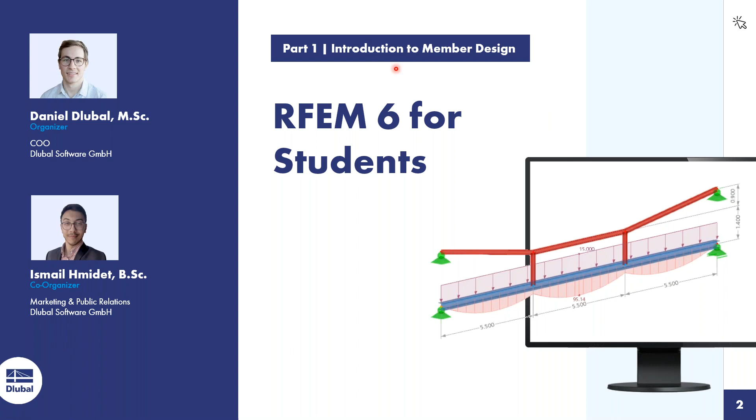So, the first part of this online training series, RFEM 6 for students. Today we have the part on member design. We will give you an introduction to member design and a few words about our platform GoToWebinar. You use, I guess, the web version, so you see it here a little bit like that.

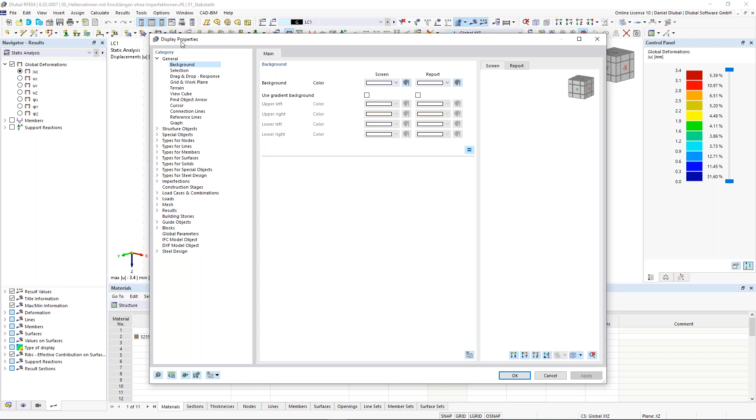Options is quite interesting. I work with a white window, maybe some of you use a black window, no problem. When I go to the display properties, I have the possibility to change the background, load dark background. When I click on that, it changes to dark. So it's up to you. I prefer the white background, so I go back to Options, Display Properties, choose the white background and click OK.

We have today a lot of international students, so it's interesting that we also offer the program in different languages. Let's click here on program options and settings. In the settings tab, you can choose a program language from these. So for the French, Spanish, Italian guys, we have this language. Okay, there are also some other options, but for now it's enough to know that in the menu bar you find all necessary functions and commands.

Then we have the symbol bar. The symbol bar is fast access to the most important symbols you need during modeling, calculation, and load application of your structures. If you want to create a member or lines, just click on that, and then you can create it. I love working with them. It makes the whole process very fast, and also some visibility options and so on.

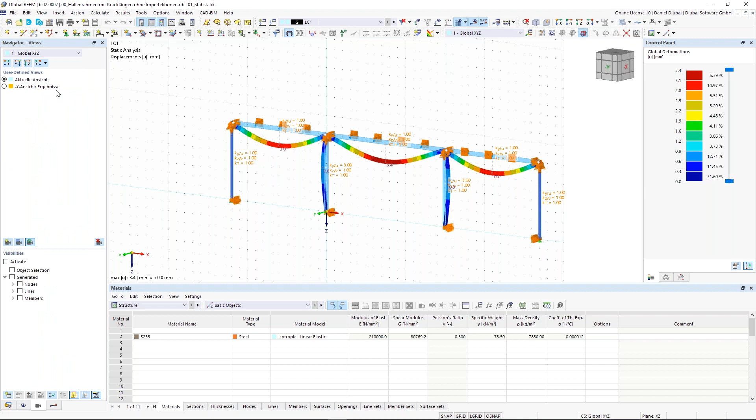Okay, the next navigator is the view navigator. Here I have the possibility to create user-defined views. Currently I see the structure from that view, and when I just want to see the results from the global y-axis or against the y-axis, I can click here and I see it like that. Okay, then I have also the possibility to set up some visibilities. I activate here, for example, members and choose here the member by section. I am interested in the IPE profiles and I see it here like that.

Perfect. So let's jump to the last navigator. This is the result navigator. Here I have the possibility of showing different results. So in this case, the global deformation. When I'm interested in the internal forces, I activate the members, activate the internal forces, for example, normal forces, bending moment, shear forces, and of course also the support reactions. Yeah, so much to that.

Then we have the tables, where you have a whole overview of all objects. You can also create objects in the tables. You can edit them. You can change values. This is a huge advantage because it gives you a very good overview, which is very clearly structured.

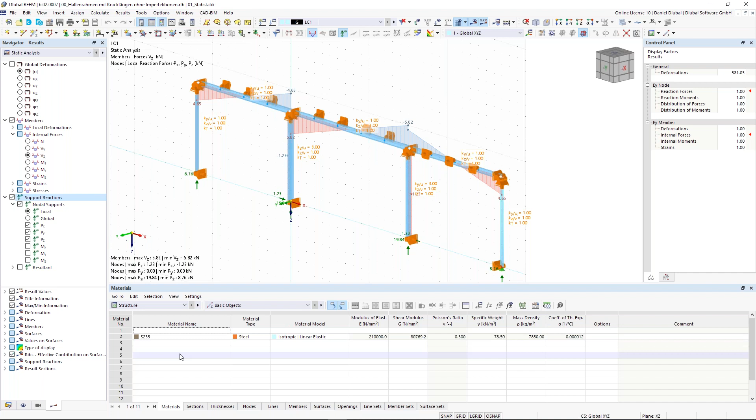I can also jump here to the HEB profile, for example, and adjust it here with another profile. I can enter here a different name and then it will affect all existing members with that. So it's a huge benefit to control it also via the tables, and it will be also very important when we have the interpretation of results.

Okay, now the control of RFEM 6 is quite easy. When you are familiar with other software applications like CAD programs, AutoCAD from Autodesk, then you will get familiar also with RFEM 6. So with the left mouse button, I can select different things. When I go from the left upper corner to the right bottom, then I can select all objects which are included in the selection window.

When I go from the other side, I select all things which are also in this window, but not as wholes. I can select them as whole object. So everything that is touched within this selection window will be selected. Okay, so much to that.

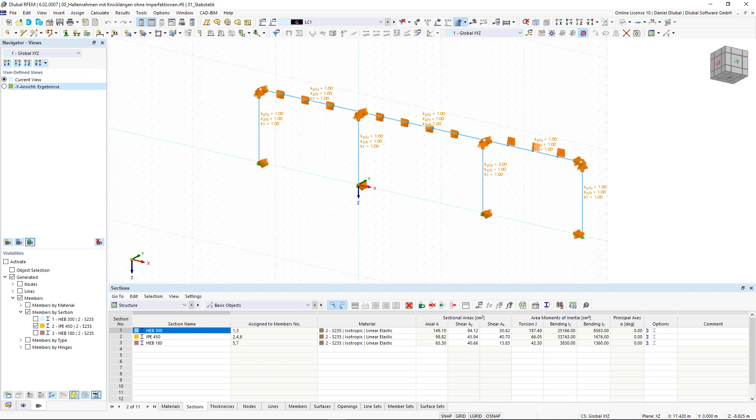Okay, with the mouse wheel, I can zoom in, I can zoom out. And when I want to rotate my working area, just press the Control key on your keyboard, press the mouse wheel, and now you can rotate your working window. Very nice. Okay, you can also use this view cube. It's a new function in RFEM 6, makes it a lot easier to change your views for your structures.

Okay, good. Yeah, this was it regarding the introduction to the user interface of RFEM 6. RFEM 6 as one program is a 3D FEA program for the calculation of members, trusses, but also for surfaces, shells, and also solids. With RFEM 6 as a main program, you can calculate and get the results of internal forces, of stresses, of support reactions, of deformation.

When you want to perform different material-based designs like steel design, timber design, and concrete design, you need the add-ons. The add-ons will be part of our later trainings in 3 or 4 weeks when we jump into the steel design, concrete design, and timber design.

Okay, now let's start with a very simple example. So for those who would like to model with me, now follow my steps. So I create a new model by clicking here in the file and create a new model. And a new window opens, and here I insert the model name, yeah, single span beam. I refer it to a project name. You can leave it here at examples or adjust it to some folders you have created in the past. It's up to you. I will create it here.

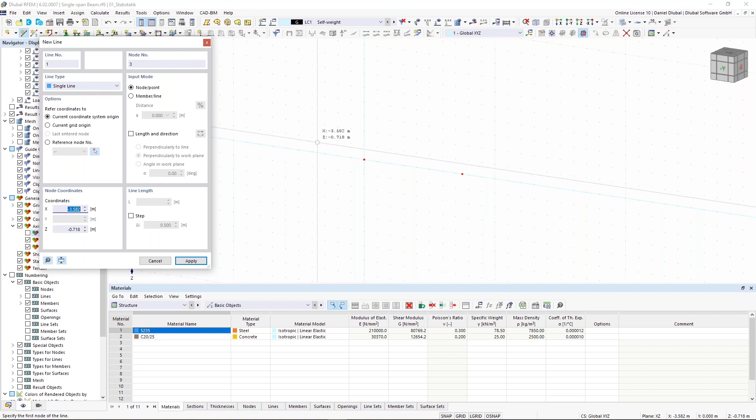So now I see these two nodes, and in order to create the line, I go here to this line, click here on new line, and now I just connect these two nodes with the line. And by double right-clicking or pressing escape, I cancel this function or this command.

Okay, now we have this line, and as I said before, in RFEM we have the philosophy that different objects are linked to other objects. So now double click on this line in order to see what I mean with these linked things: I can assign a member to an existing line. So I activate here this member and a new window appears.

So now in this window, New Member, I can create a new member with a member type and also assign them a section. In the studies, especially in the first semesters, you calculate your structural systems with no stiffness, but in reality you have stiffness. In order to also consider the pseudo stiffness in the first phases of your study, I refer to the member type definable stiffness.

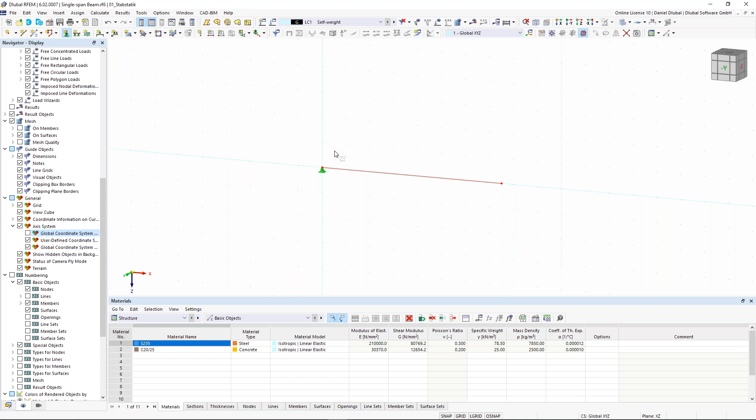So you see here this member. Now we need supports. I go again to the symbol bar, click on assign nodal support, and I choose the hinged support. So I will activate all translational forces. Choose this node, right click in order to close the function, and now I go back again and choose the support with the roller in the X direction in order to release the X forces, and now I have a single beam.

I can show the supports a little bit bigger just by right-clicking on them. I can adjust the size of the graphic, and now I activate load. In RFEM, when you want to create loads, you have to assign them to load cases. And with every new model, one load case, in this case the self-weight, is already created automatically in the background. So I jump to the load case and go to edit active load case.

When I want to recalculate or compare my hand calculations with RFEM, you normally shouldn't consider the self-weight, because it can cause you to not get the same results as your hand calculation. So for this simple example, I deactivate the self-weight and I rename my load case to test load. Oops, sorry, test load. I click on OK.

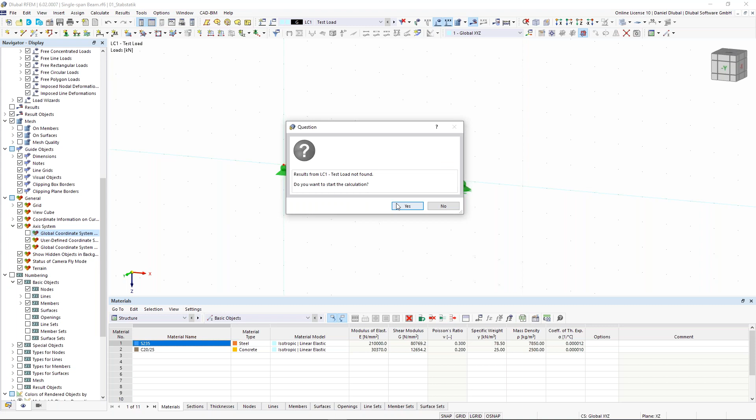So the next thing is calculating the structure. I have two possibilities. I can show the results of this specific load case, or I can calculate everything. In this case, I will show the results of this load case. Then this question arises, and I say yes, because I want to see the results of this load case. In the background, RFEM calculates the results, and then we take a closer look at them.

First we see the deformation, which is a little bit nonsense because we have 99,000 millimeters deformation since we don't have any stiffness. But in this case, only the internal forces are interesting for me. When you have statically determined systems, the stiffness of a structure doesn't influence the internal forces. Only with statically indeterminate systems does it have an impact.

So I go to Members, here in the Results Navigator, and activate the shear force. I see the shear forces in kilonewtons, and then the bending moment My, 18 kilonewton meters.

Interesting. Now I activate the support reactions. I see the support reactions, also pretty interesting. Now you can make a kind of plausibility check, comparing the support reactions with the shear forces, for example, and yeah, they are the same.

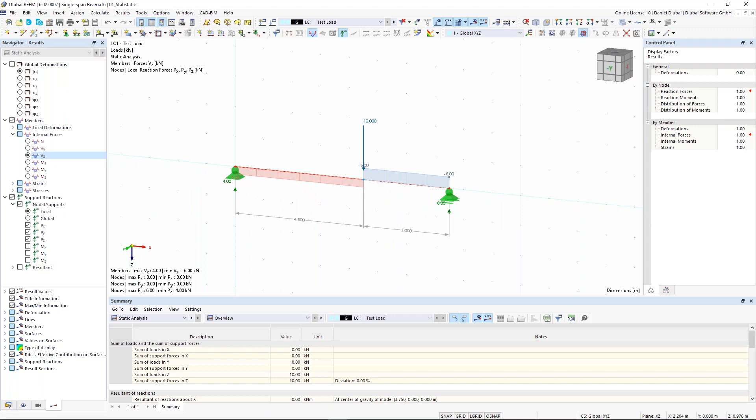On top of that, I would like to show you one more thing. When you want to measure things, you can give them dimensions. So here in the symbol bar, I click on linear dimension. I click on these nodes and say, okay, the XZ plane, and I can put the dimensions depending on my nodes here, for example. It helps to make it easier for you.

One thing more, at each member I can also show the tensile direction. So I go to the display navigator, activate the tree structure of the members, and in this case I can show you the bottom fiber. This is the correct word, not tensile direction, but member bottom fiber. You see this dotted line, and it shows you in which direction the tension would go for the bending moment, for example. Also the member orientation and the member axis, but more on that later.

Okay, now this was it, this was the first example, and I have also a question prepared for you. Let's do this. It's a multiple choice question, so more than one answer can be correct.

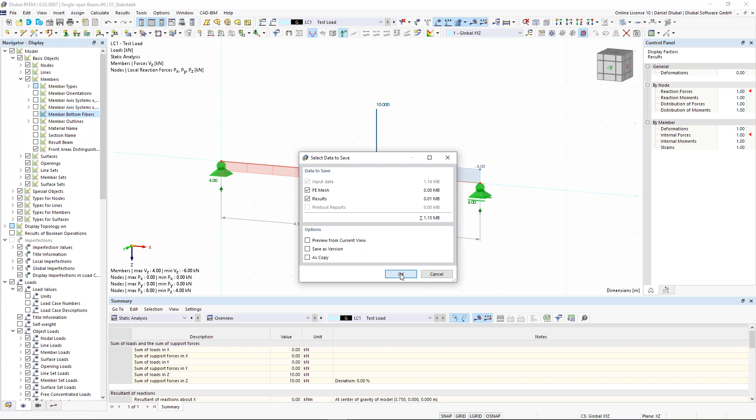I have a two-field beam, so I will save this here. I go to File and say, okay, save as new. So I will create now a new file or new model: two-span beam. I click on Speichern, which is the German word for save.

And I delete everything. Just select everything and then press the delete button on your keyboard. And now I will create two members. So now we have another philosophy for the two-span beam. I click here on the symbol bar, new member, and now I create a new cross section, a real cross section.

So I go to the Section tab, and as you see from the last project, RFEM remembers the last sections you were using for your projects. In this case, I will create a new cross section, so I click on this button to create a new cross section.

And I open here the cross section library, and I am looking for a standardized profile. So in this case, an HEB profile. I scroll a little bit down and then I will find here this HEB profile. I refer to the Euro norm, so more to the Eurocode. And here I find HEB 300. This is absolutely fine for me.

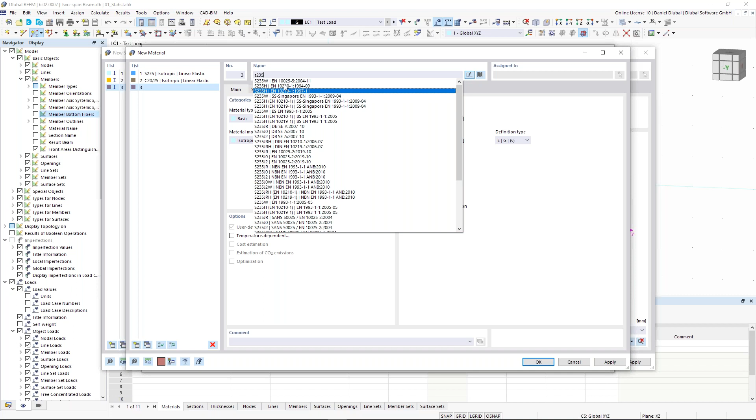So I can enter here S235, and now I can choose here the one I would like to have. But I don't do it because I have it already here in this case, so I cancel it. I just need here this one. Okay, I click on OK.

And now you see here for my member start, I have here this HEB profile and this material. I click on OK.

And now I create a beam with a length of 5 meters. So just go here to this grid point, 5 meters, and again 5 meters. So the total length is 10 meters, but in the middle I have here this node.

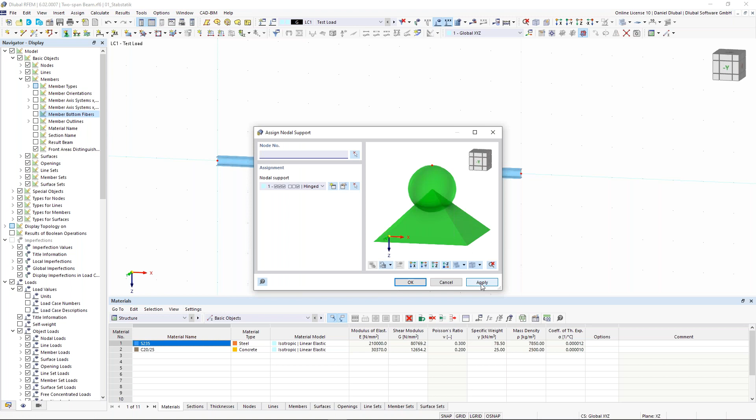The next thing is that I want to have here support directions. So I activate here this nodal support again. And now a very interesting function in RFEM is that we have here also this apply button. I show you how it helps you define or assign different objects easier for your structure. So for the first node, I would like to use here this hinged support. I choose here this hinged support for this node, click on OK. And now I don't click on OK, but I click on apply. And this node will be created automatically.

And the next thing is that I change here the nodal support, choose here roller in the X direction, and select both nodes with a selection window. Click on OK again. And now I click again on apply. And now you see, okay, how easy you can do this with this dialog. I click on OK. And now you see here the structure. Perfect.

So what's next? The next thing is that we consider now different load cases. Because when I refer to my PowerPoint, I will show you my PowerPoint. We have here this two-span beam, and information about the profile and so on, and also here 3 different load cases. And I would like to combine them in order to determine, first of all, the results like support forces, internal forces, and so on, but also the governing load combination, or the leading load combination that causes the largest internal forces, because we will have here also 2 additional load cases like the imposed loads, at first for the left side of the beam and then the right side of the beam.

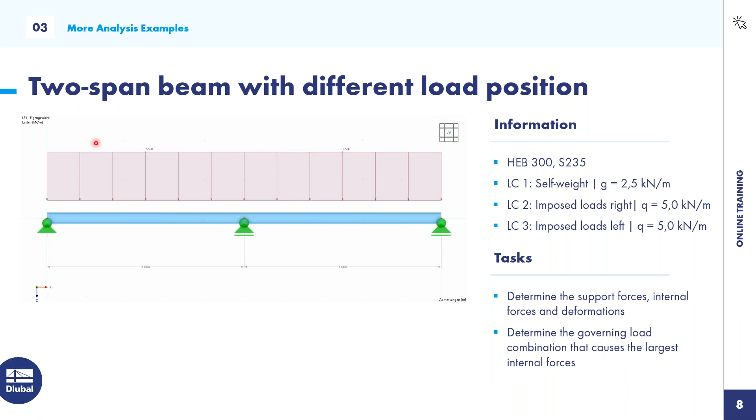Okay, let's go back to RFEM 6. Let's do this. I go here to the data navigator because you can also access the load combinations or the load cases from the data navigator. Just click here on load with the right click, load cases and combinations. It will open here this new window. And now this is also pretty nice.

I would like to combine different load cases to load combinations. And therefore I can refer to some standards. I refer to the standard of our Eurocode because I'm from Germany, this is familiar for me. You can also refer to other standards. We offer a lot of other standards, like the American standards, Canadian standards, and so on, and also the classical European standards.

Okay, and now I will also activate the combination wizard, because this is a kind of tool which helps me create these combinations of load cases automatically, and I don't have to do it manually. This is a huge advantage. So I go here to load cases. I rename here this load case with self-weight.

I activate the self-weight here, and I create 2 new load cases. The new load case is imposed load left, and I choose the correct action category, in this case imposed loads category A, according to my European standard. Now I copy the load case and call it right, because with that load case I apply the loads on the right field of this member.

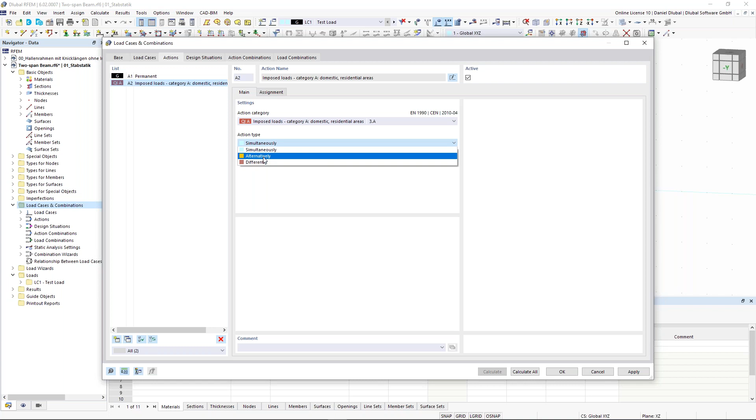Different action types: alternatively, differently, and simultaneously. When I choose simultaneously, this means that both load cases can be combined with each other. Alternatively would be they would exclude each other. So simultaneously would mean that load case 2 can be combined with load case 3. Alternatively, load case 2 with load case 3 can't be combined.

Okay, so let's go to the design situations. According to the Eurocode, the European standards, we have different design situation types. The serviceability state isn't interesting for me, so I choose them and delete them. Just the ultimate limit state - I go here through the information, and here you see short information about the combination rules, so the permanent factors, partial factors, and also here some coefficient combination, the partial factors.

Yeah, so it's interesting how the program combines the factors for the load cases. Now you can see here the action combination. Let's jump to the load combination, and let's pick this one. So here you can see the partial factors, that is 1.35 times load case 1, plus the other partial factors, partial factor 1.5 times load case 2, and so on.

And now here you see also these leading load cases or leading action categories. It's pretty interesting just to know how the program considers these different load combinations. Load combination is nothing else than a combination of different load cases under the consideration of these partial factors and combination factors. Okay, I click on OK.

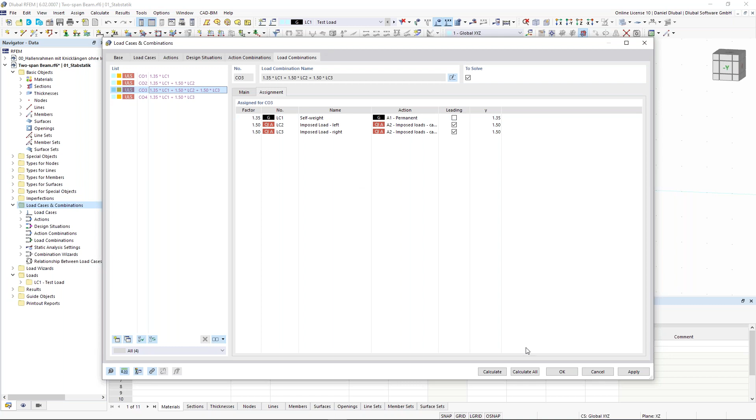Now let's apply the loads to the load cases, and this is the pretty nice thing. I go here to the load case self-weight, and go here to the new member load. What is now really cool is that I can stay here in this dialog, in this window, and can apply and assign all loads to my structure, and change the load cases in this dialog. This is a huge advantage, and I like this very much.

So I click here on load case 1, self-weight. The load magnitude is in this case 2.5 kilonewton per meter. Now I select the members, draw a selection window because I want to select all members. I click on OK, and now apply and next.

And now this is a perfect thing: I can change the load case, change here the load magnitude to 5, and assign it to the other member, but stay in the same dialog. This is pretty nice, makes a lot of fun for me. I click on OK, say again apply and next, and do the same thing for the right load magnitude. So for the right load and field, click here the right field, click on OK, and then in this case it is enough when I click on OK.

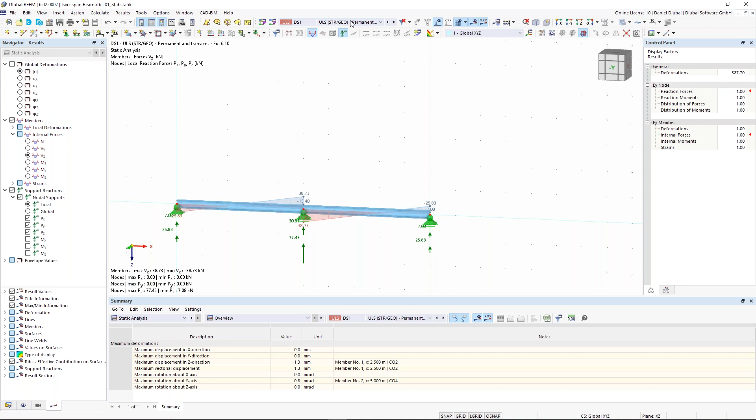Okay, now let's do a kind of verification or validation interpretation. So first of all, I always check my results in the self-weight load case because this is clear. I go here and check the results. So first of all, the global deformation. I see the global deformation here. When I want to see it with some colors, no problem.

Go here to the chapter of area members, and with diagram, and here deformation, section colored. So this is a deformation, sorry. So the area deformation, members, and section colored would look like that. You can see here on the right side a kind of control panel where you can see these colors.

Okay, the next thing is the verification of the vertical or the support forces, and I see here as sum, the sum of loads in the Z direction is 36 kilonewton, and the same sum here in support forces, so there is no deviation, and this is good for me.

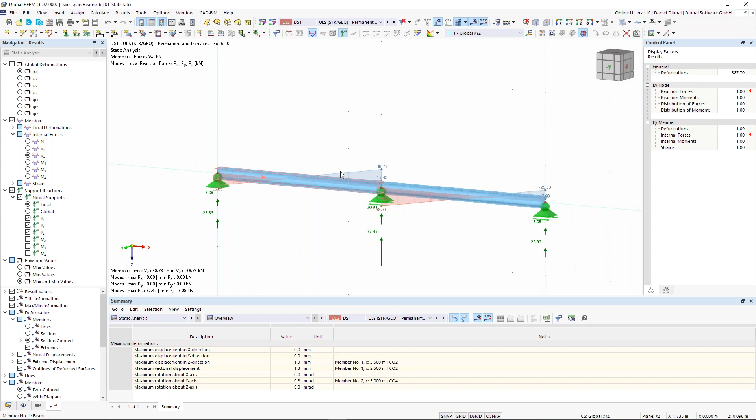Okay, the next thing is, let's go to the design situation. And as I said before, I want to see envelope values. So let's go to the members, and now you see here different kinds of distribution values of the shear forces and also the bending moment. And I can say, okay, please show me the maximum values. So in this case, the maximum field moment.

And when I take a look at the minimum values, I see it here. So the minimum is here, minus 37. So the support bending moment. Okay, this is the summary, and now it becomes interesting because I want to see the results by member.

So I go here to the table, static analysis, results by member, and I go here to the internal forces, and now I want to take a deeper look at the maximum field moment and the maximum support moment. So the most minimum and the most maximum value. And here I go to the extremes area, and here I see these two results.

So I see here the maximum value of the bending moment My, and now I see also the corresponding loading, and this is in this case load combination 2, and for the minimum value it's load combination 3.

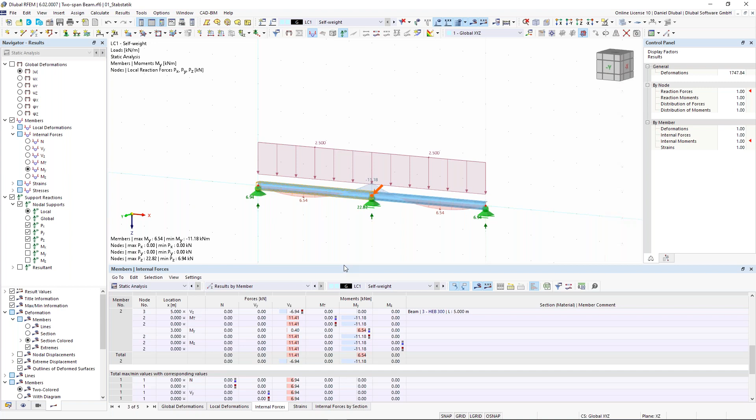So one thing more, I go through the self-weight. Now you don't have to do this with me, just pay attention because this will help you when you are working with RFEM 6 and during your studies. So when you work with table books where you can just put in your dimensions, then you get some results for the maximum bending moment or shear forces and so on.

It's important to know that these kinds of table books don't consider the shear stiffness, and RFEM considers the shear stiffness. What is the shear stiffness? Taking into account shear stiffness leads to an increase in deformation due to shear forces. In order to deactivate it, you have to go to the cross-section and then you can deactivate it.

So remember here the support bending moment of minus 11.18 kilonewton meter. I go here to the sections, in this case HEB, double click on that. And now you can see here deactivate shear stiffness. And the influence of the shear is dependent on the cross-section areas AY and AZ. When I deactivate, they have no value, and the shear stiffness isn't taken into account.

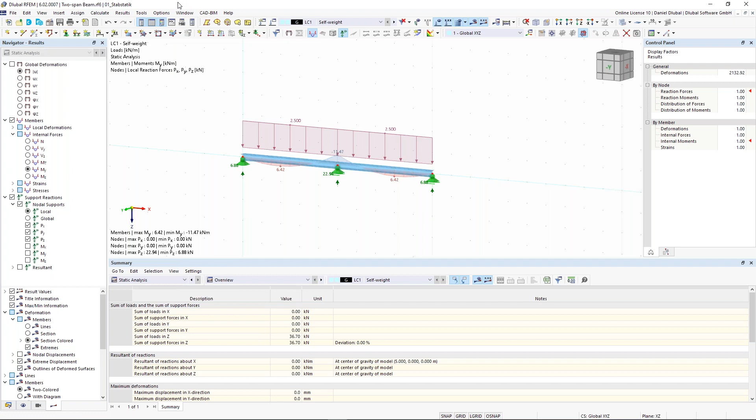So if you want to take a closer look at the standards we support, go to your project or your model and just right-click Base Data, or also here in the symbol bar you find this option. Click here, and as Ismail mentioned, we support different standards. Just go here to the add-ons. You can activate, for example for the steel design, different standards. So I click here on OK, and then you see that we support different standards, and also the different national annexes. Okay.

So let's continue. Now I will do an example by myself, so I will make it a little bit faster. So just watch and learn. Oh no, sorry, I don't want to delete everything. Now I want to add hinges. This is one-time statically indeterminate, so I want to add a hinge here in order to make it statically determinate. So how to do that?

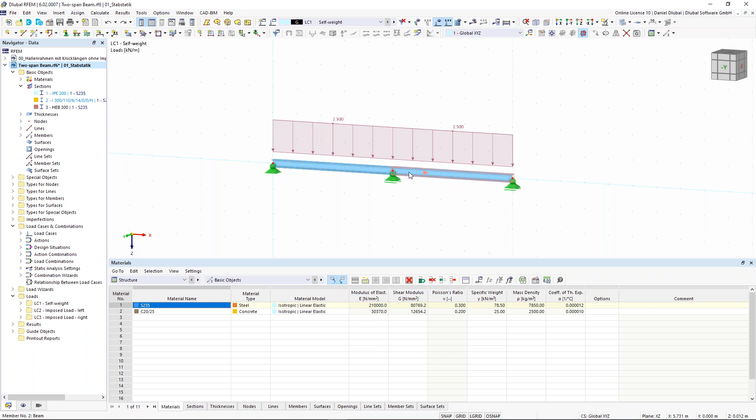I click here on this member. Then for better visibility, I change the visibility mode to wireframe mode. Then I right-click on members and divide the member by distance. And now I would like to divide this member at a percentage of 17%.

Why 17%? In my German student book, Schneider Bautabellen, there is a hint that in order to make the support bending moment and the field bending moment equal, the perfect position of the hinge is 17% of the length of one of these fields from the middle of the support. So I click here on 0.17. This is given by my table book.

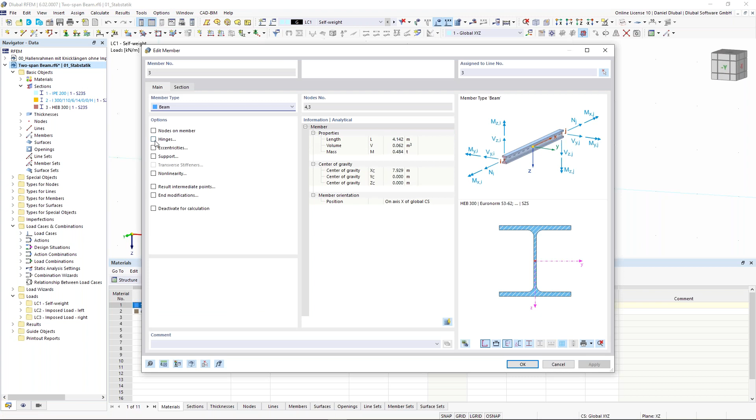The division point is calculated automatically. Then I click on OK. And a new member was created, because I will need this member for the creation of hinges. How to do that? Double click on the right member. I activate the option of hinges. A new tab appears right here. And now I go to new member hinge.

So, and now it's important to define the hinges correctly. In this case, the coordinate system refers to the local member axis, and I want to release the rotation, so I activate phi y here in order to create a moment hinge, and there the moment will be 0.

When I want to release a translation or deformation, for example a normal hinge or a shear hinge, then I have to activate these translational hinges here. If it's a little bit difficult the first time, no problem. You can also release, for example, normal forces, shear forces, and also the bending moment. And what will happen here? I activate it and release it, and the value of this hinge will be 0. So I click on OK.

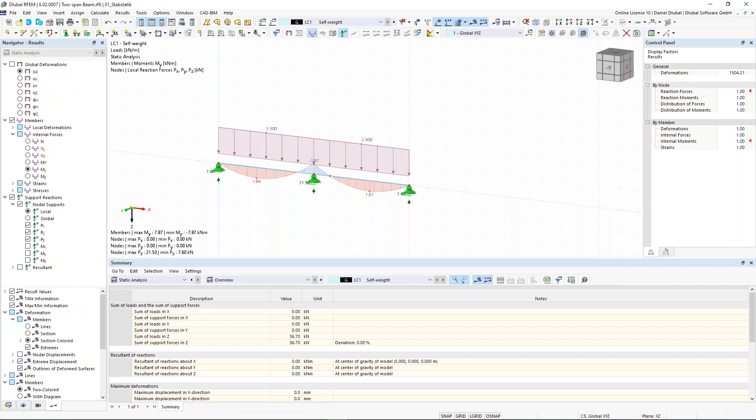So much for that. I deactivate this, and now I calculate this structure again. And now pay attention and see what will change. So we have assigned a hinge here, and this hinge means that the moment is 0 there, and it is 0. Additionally, we see that the field moment here is 7 kilonewton-meters, and the support bending moment has the same value.

Interesting, huh? In Germany we call these kinds of hinged beams Gerberträger, named after the founder of these systems. With hinged beams, we can make these beams quite economical and also statically determinate. The previous beam had one degree of freedom, so when you calculate it with the force method, you need to find this undefined value, and with this hinge we make it statically determinate, and this is a huge advantage.

So yeah, let's continue with the poll. Okay, I will close the poll, and most of you have chosen the right answer. Gerber beam systems or hinged beam systems are statically determinate systems because we make them statically determinate by giving them hinges. In this case, this hinge.

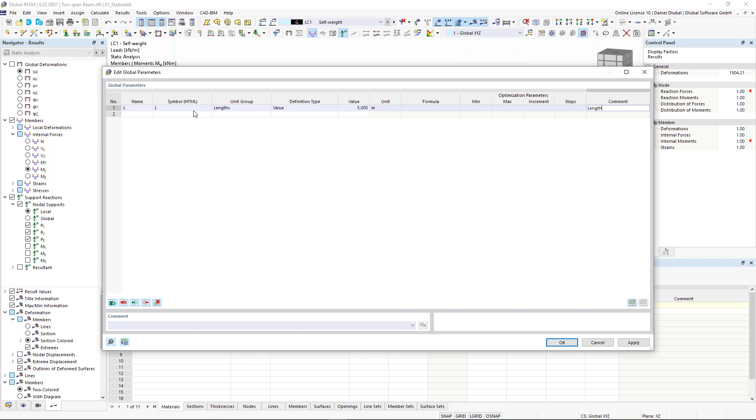And now I give it a name, L for length. Then I press the tab key. The unit group in this case is length, and the definition type is value. So I insert a value here, but I can also give the whole thing a formula. But in this case, a value. I insert 5 meters and comment it with length, so that I know later that L is the length in meters. And the same thing for this distance E, this 17%, I give it the name E.

And now I don't want to use a unit group here. I want to use factor, because it refers to the existing length as a kind of percentage. And I give it 0.1716. And this is the factor. Okay, I click on OK.

Now I have to assign these parameters to my structure by manipulating the coordinates. The first node will remain at its position. The next one needs to be changed. So I double click on this node. I want to set a formula, giving the x coordinate the parameter L. So I click on this arrow, click on edit formula, insert just my L parameter and click on OK. Click again on OK.

And the same thing for this node. I activate the formula, and in this case it's L plus the factor E times L, 5.858. I click on OK. And last but not least, I do the same with the last one, just entering 2 times L. Click on OK.

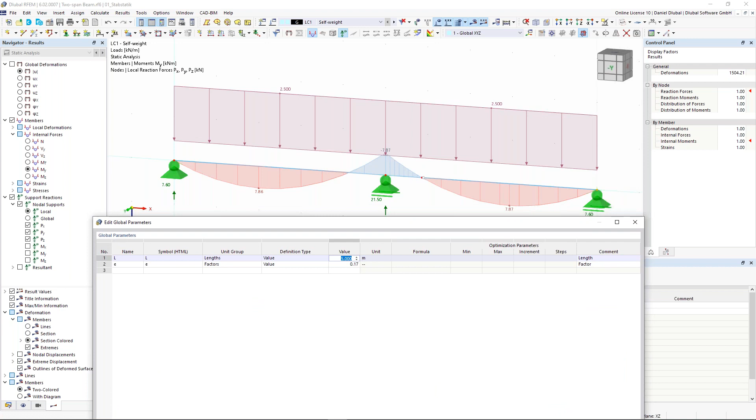Click on OK again. And now I want to change the values, so pay attention to the structure. I insert here the value 4, let's do 3, and I say apply, apply. And now you see how the structure was changed through these parameters. Interesting. Okay, so much to the parameters. Okay.

Next thing is just a structural system with various types of loads and also some supports. So I delete this again. Now I will create the nodes with the tables. I go here to the structure, go to the tab nodes.

So the next 2 examples you don't have to do with me. I will do it a little bit faster, just giving you an overview about how you can do things in RFEM 6. So I create here a new node, going through the inputs with the tab on my keyboard, and now I insert here the coordinate 0 and 0, press the enter button, and the next coordinate is, let's take a closer look, 5 and 2, press OK, and the next one is 8 and 2, press OK, and now you see here that I have these nodes.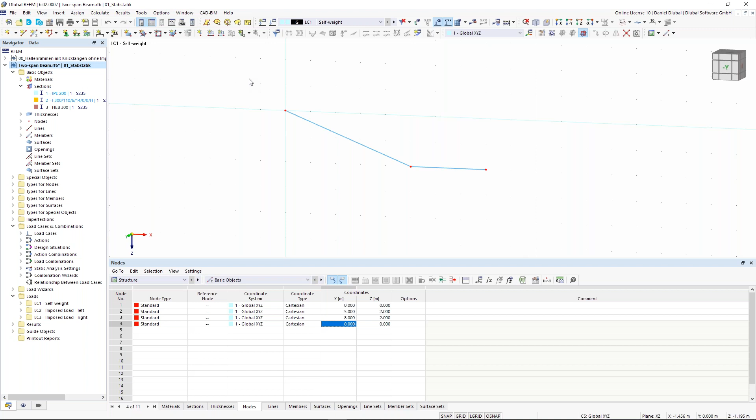Now I create a new member, the same thing, the section is HEB 300. I click on OK and I connect the nodes in order to create my system. Right click, and the next part is that I assign these nodes a nodal support. So I choose directly a node. RFEM 6 remembers the selection, and this is the reason why the selected node appears here in this dialog. I set it to fixed, okay, and the same let's do for this one. And in this case I create here a roller in X direction.

Now let's take a closer look at the definition of the nodal supports. So, very important thing. When I want to have translational deformations in my support, then I have to release them. So when I activate here one of these rotations or movements, then this support activates forces because it prevents the structure from moving or rotating. So when I want to have vertical forces in this support, I have to activate the UZ, because then it prevents the deformation in this direction, and therefore I will also get vertical forces. And the same also for the rotations. Okay, so much to that. I click on OK.

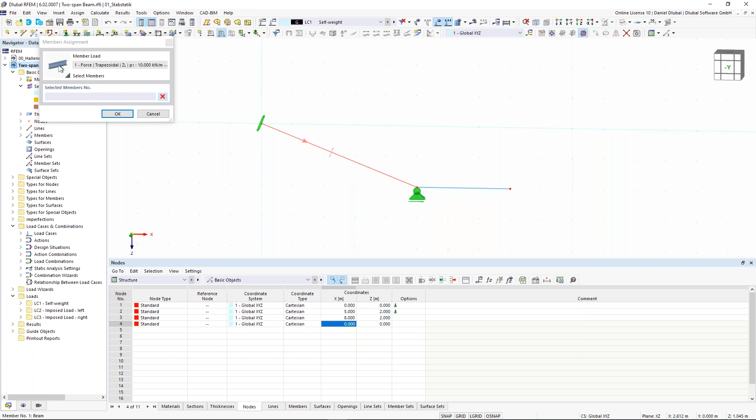And now I leave here this load case self weight, and now I apply some loads. Just various loads. It is not a realistic example. I click here on new member load, and in order to have also some linear load distributions, I can say, okay, I want to have a trapezoidal load distribution. I will start at the beginning of my member with 10, leave it here as 0, and say, okay, at 80% it should stop. I assign it to that member, and this is now the nice thing, that I can remain in the same window. Okay, apply and next.

And the next member load is another one on the second member. So I activate here 1 and 2, give them here 20%, and choose the second member. I click on OK, and then I click on OK again. And now you'll see here the applying of these member loads, pretty interesting.

And the next thing is that I want to have here a nodal point load. So I go here to the symbol bar, new nodal load. And when I have inclined nodal loads, then I can separate it into different components, or I can also specify a direction. In this case, we do 10 kilonewton for the normal Z direction. I choose here this node, click on OK. And now the interesting thing is that I can see in the image where the node appears on the whole structure. I can see it here.

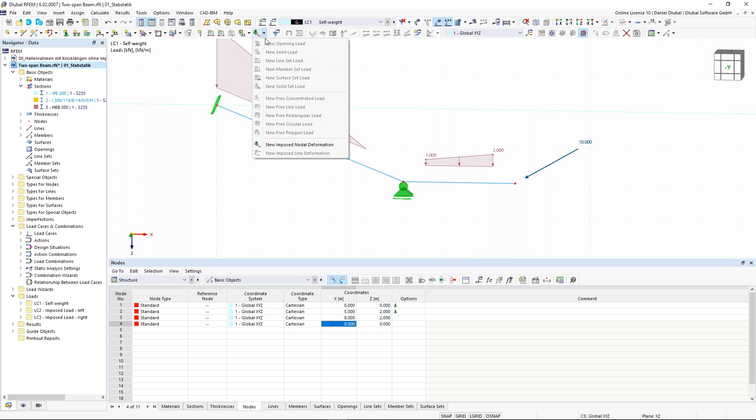And one thing more, I can also give some nodes an imposed nodal deformation. So here, I find this in the symbol bar. I say, okay, new imposed deformation. And in the opposite of the global Z direction, I say, okay, minus 20 millimeters. I assign it to this node. I click on OK. I say OK again.

Now I will calculate the structure. And for me, the results regarding the deformation will be interesting, because I set a predefined deformation to that node in that direction. And now I will see if it's correct.

Okay, well, internal forces, you can see the internal forces, shear forces, normal forces, and so on. But for me, the vertical deformation of this node is more important. So I activate the global deformation, and now I want to see the UZ, so the vertical deformation. And I just want to see the lines, because then the results are more clearly visible.

And yes, it's correct. Although there is a support, we have deformation at the support of 20 millimeters in the opposite global Z direction. Okay, so much to that.

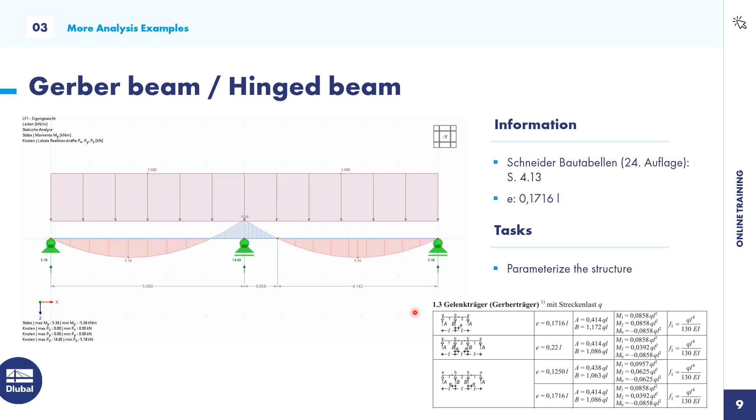Okay, next example, and then we make a short break. I will delete this again. And now let's jump to my PowerPoint presentation. So this was the Gerber beam or the hinged beam. Here I have also attached the definition of this E. It's from my student table book, Schneider Bautabellen. Maybe you have something similar in your country, I don't know. This was the last example.

And now we do this two-hinged frame with a tension rod in the middle. It's a pretty interesting example you can also do with the force method during your study. We have here this two-hinged frame, and now we give it an additional unknown parameter by adding a tension rod here in the middle. And we have 3 different load cases. The task would be to determine the support forces and so on, and also the degree of statical indeterminacy.

Okay, so let's go to RFEM 6 and model this structure. I will use for the columns an HEB profile we had before. This is also an example you don't have to do with me, because I will do it a little bit faster. I will do this, so 5 meters high. Then I go here. Now I make the roof 5 meters in X, and also 3 meters high.

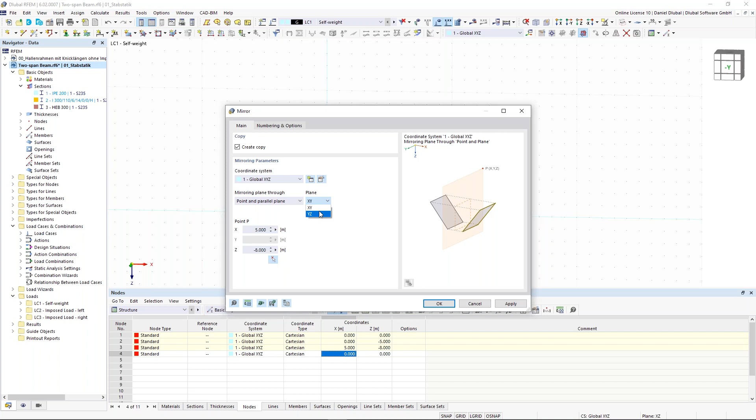Okay, the next thing is that we add an additional rod. And now we have different member types. You can see here the member type beam, and this member type transfers all internal forces to other beams. I can add additional hinges to that beam. Let's do it that way, and then I will explain other member types. So hinges, I activate phi y, so that we will have bending moment hinges.

And because it will get tension forces, I can choose a smaller profile. So I will create a new profile. I will choose CHC here. I hope it will find it. Okay, and I choose this one. It's a circular hollow section. It can be used for applying normal forces. Pretty nice. And I say okay.

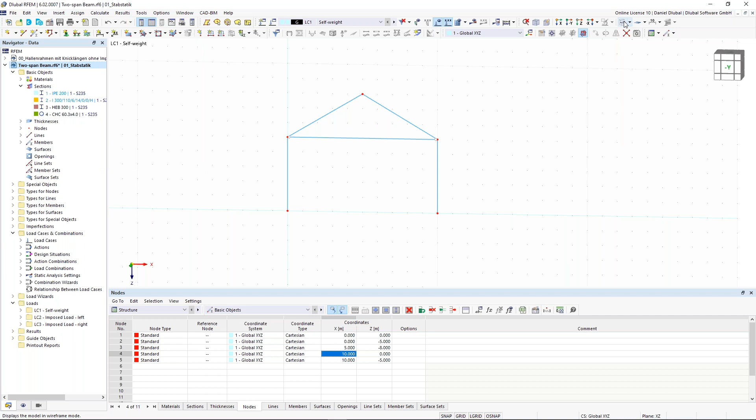Now I draw this tension rod from the left side to the right side, and I change the display mode in order to see the right profiles. And now I create the nodal support, click on OK. And now I apply the loads. First of all, I see my load cases. I have self-weight and imposed load from the last example. I want to change it.

So I go to edit. I change this one to snow, this one to wind, and this one to temperature, because then you see all possible load applications we can do. So distributed loads, single loads, temperature loads, nodal restraints, nodal deformation, and so on. Next, we activate the base and deactivate the standards because we don't need them for now. I click on OK.

Now I apply the loads. I jump to the snow load, go to the member loads, and I have 1 kilonewton per meter. And the load direction for snow loads is different. It's not on the true length, it's on the projected length. I choose both members. I click on OK. I say apply and next.

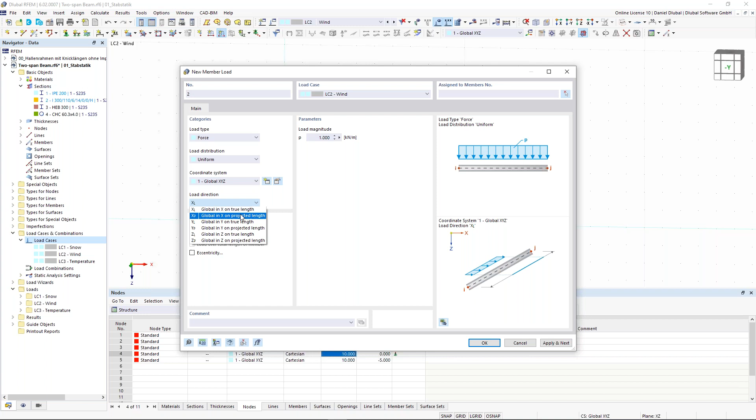And now I choose the load case wind. Here the direction is the global X-axis. So I say true length, first of all on the column. It doesn't matter if you have it on the projected length or the true length, because the column is vertical. Column, I say okay.

And now I want to refer and apply my load according to the local member system. So I say, okay, I want to have it like that and put it here, because normally the pressures are on the local axis of my inclined beams. So I say apply next. Now it looks like that.

And now the temperature, I'll do it here a little bit different. I cancel the whole definition because I wanted to show you how you can make an object selection. So first of all, I want to display different cross-sections with a different color. So I jump here to the display navigator, scroll down to the area of colors of rendered objects by object property, member, and now I want to see them by sections, like here. So I have the brown color for this HEB profile and the green color for this circular hollow section.

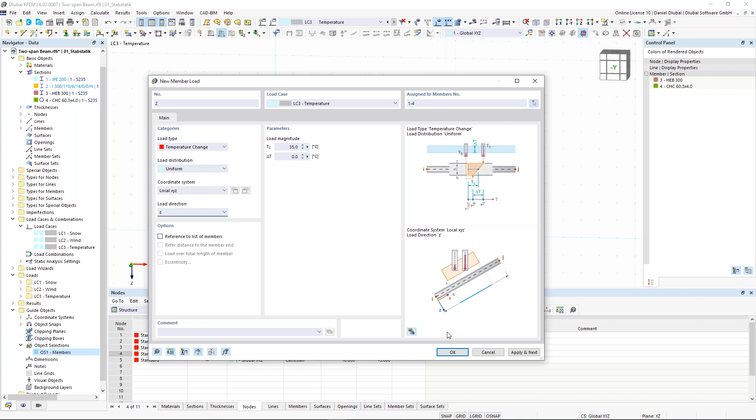Good. Now let's calculate all load cases. Then we will take a closer look at the results.

Okay, perfect. So as you can see here, maybe for the snow load, you see here the deformation. And also the internal forces, and as assumed, the tension rod gets tension forces. And also when I take a closer look at the members, I see it like here and so on.

So now we have in RFEM different member types. This member type is a beam, but with hinges at the end of the member. In order to consider the same structural behavior, I can also choose the member type truss. Truss is nothing else than a beam type, but with moment hinges at the end of the member.

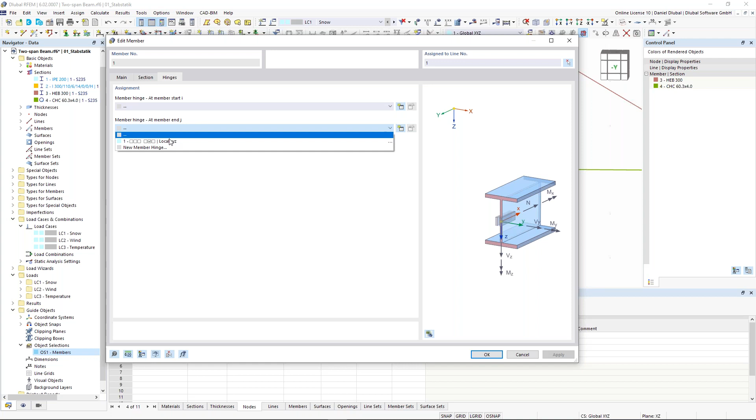It's false to assign a hinge to every member. So if I assign a hinge at the member end here, and a hinge at the member start there, then this would be nonsense, because RFEM crashes - we have a hinge chain, and this hinge chain is not right, because it would cause an instability in the program, and the program doesn't calculate this.

So we can test it. I activate it. You see here this error and failure because we have a singular stiffness matrix, because the structure is unstable at that node due to the chain of hinges.

To avoid this, you have to remember just one thing: if you want to build a complete hinge where all members connect, you have to leave one member without a hinge. So I'll show you the correct modeling of this.

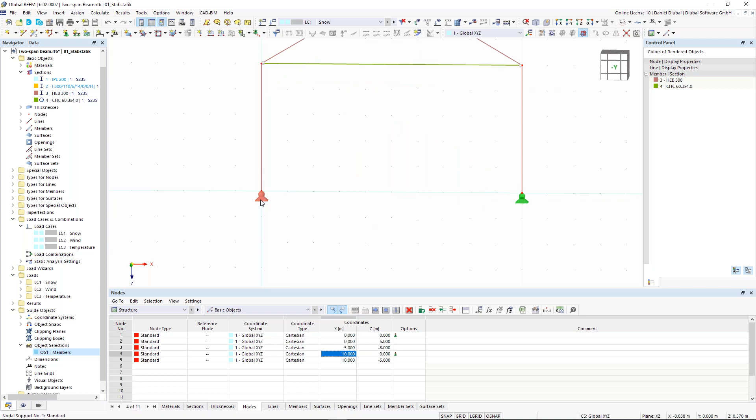I deactivate the hinge here, and now I want to have this whole triangular thing where all things are connected with hinges. First, I change these nodal supports to fixed ones, and then I assign a hinge at the top here, and the same thing for this member.

Click on OK, and this would be the correct definition when I want to consider hinges everywhere - I don't know the English word for that, but this is what I mean.

Now I calculate this, and when we take a closer look at the bending moments, we will see that the definition was correct. Here we have the bending moment, and every time where there is a hinge, we have zero moments.

And this would be the correct definition of the hinges for that case, for example. Okay, next example: the truss, what we have here.

I go here to the PowerPoint. So, ideal truss - we have here a truss with different members, and the members will have a member type truss, only normal forces. An ideal truss is weightless, straight, only carries normal, axial, tensile or compression forces, and all loads are applied on the nodes or on the hinges.

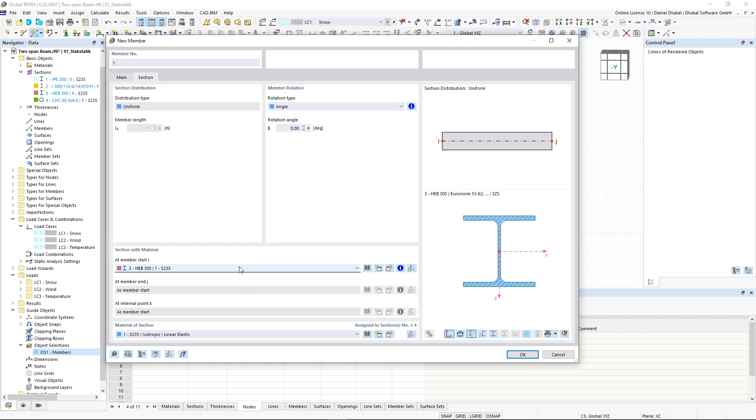So I delete this structure again. I create here a new single member with the truss type - this is important for the right consideration of this truss. And for the section, I take again this HEB 300 profile, and click on OK.

And now I create this new member - but this was unfortunately the wrong way to do it. I have to do this by the general option instead, so I have to redo it, but no problem.

Now I put here the length and also the direction. I have 3 meters - all sides are similar, so I choose this one, 3 meters. The angle in the work plane is minus 60 degrees in this case. Then I can do this like this one, I change this, and I have it like this.

So now I draw, or I can refer to this member. I say OK.

From that array, now I have this triangle. And now, very important, my favorite function in RFEM 6, I select everything here.

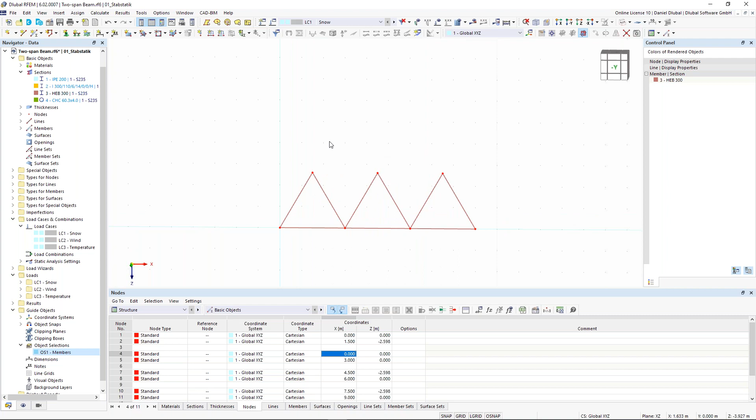So then I create again a new single member. I choose here the same object properties in graphics, so this enables me a smooth way to insert different objects or members, for example. I click here on OK, and connect here these two members.

So now I have to correct the member type because I saw I have created the member type beam. I select everything, and now it's okay when I just double click on one of the members. You see, there are several members to assign, and I choose here truss, and I can change all members at once to the member type truss, only normal forces.

Perfect, so the next thing is assigning them here nodal supports. I give them a nodal support, hinged, and here again. I make them a little bit bigger, so like that.

And now I assign here to these nodes nodal loads. So I go here, new nodal load. I select the first nodes with 10 kilonewton, click on OK, say apply and next, and the next one with 20 kilonewton I assign to the right node, click on OK, and say OK again.

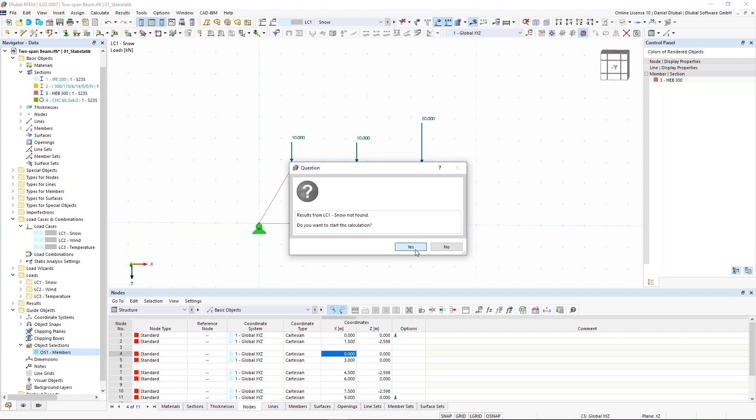So again, show me the results, I say yes. And the special thing about the trusses, and also about the member type truss only normal forces, is that only the stiffness in the length direction is activated.

So let's take a closer look at the results. And you see no moment, only normal forces. And when you see here member type truss only N, then you see, okay, only normal forces are carried, and only the stiffness in the length direction is considered.

So let's go back to the normal forces. Now remember, all compression forces are in general negative, and in RFEM, when you have the standard design options, blue. All tension forces are in general red and positive. You see, here I have the tension chord, and here the pressure chord, and here you see the different normal forces. So again, negative normal forces are pressure members, and positive normal forces are tension members. Okay, so much to that.

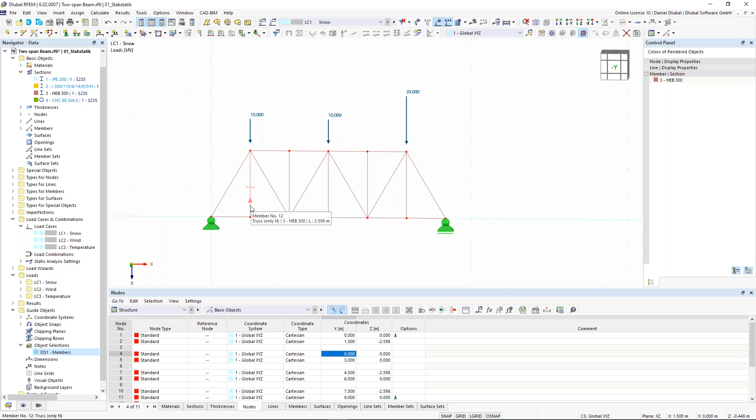Perfect, and the last also for that. Okay, good. And yeah, there are different rules in order to determine these null members. These are the members which don't carry any normal forces, but are sometimes responsible and also mandatory for the whole statical determinacy.

So let's take a closer look at that, I will calculate it again. A classical student example would be: calculate this truss structure and determine also the null members, so the members who don't get any normal forces, and then you have it. Also determine the positive and negative normal forces, so the tensile and pressure members.

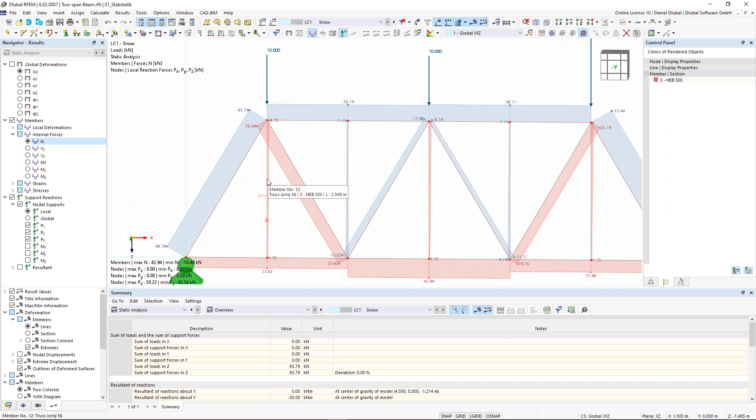As you can see here, these things get some normal forces. This is a little bit strange, but I can tell you why, because I considered the self-weight. Here in this load case, I deactivated it. Now I calculate it again, and now you will see that these members don't get any normal forces because of their structural behavior. Yeah, and no normal forces.

So much to that. Okay, so I have a poll prepared for you, which summarizes this chapter a little bit. So this one.

Okay, let's close this poll. The correct answer is that compression members are usually truss members with negative normal forces. In RFEM 6, this is usually the case for these blue colored normal forces, because there we have also a negative value, and now you know it.

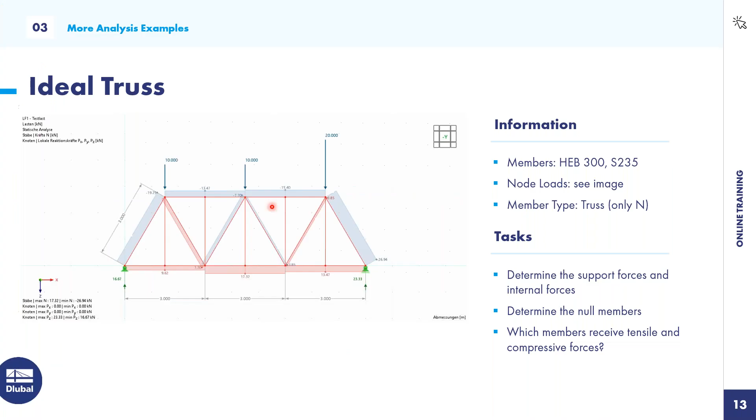So this was an ideal truss, but in reality we have trusses which also carry some loads, where the load is applied on the structure, not on the nodes. So I delete this again. Now I will do an example where you don't have to do this with me, a kind of spanned beam. Here we have a normal beam which carries bending moments, which is also bending active, and this supporting tensile structure is just carrying normal forces. So let's model it.

So I create here again a member with a HEB cross section. I click on OK. And the length of this member is 16.5 meters. I say OK. And now I divide this member internally in order to get two nodes.

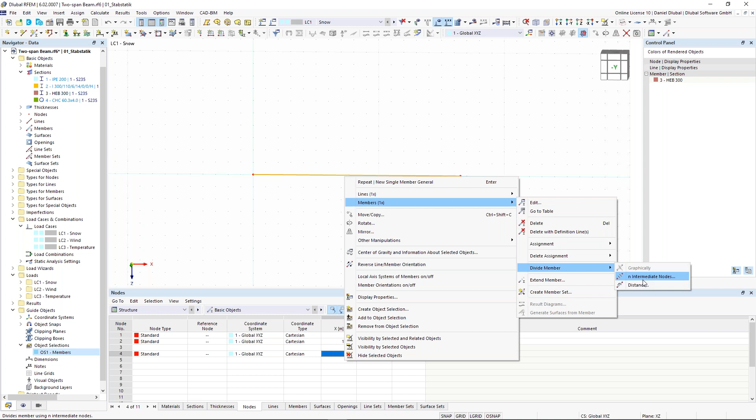So right click on that, members, divide member, and n intermediate nodes, because they will have the same length. I click here on 2 and select here this option. This option will cause that the member is not divided into different members, but we will get the nodes.

So here we have the blue nodes, and you see, when I go through the member, it is one member and not three members. But I have here these nodes, and this is pretty nice, because then I can refer to this structure more easily and see the results more easily.

So the next thing is that we create another kind of member. In this case, the truss, only normal forces. Section is in this case this IPE 200 profile, because it's a little bit smaller. And now I just choose here the length and direction, 1 meter, and go here 1 meter upwards. Here again.

And now I want to create here also a member. I choose here these two nodes and these two nodes by clicking on the Control key. Right click on one of the nodes. I say move and copy. Now I can create a copy of the selected nodes. I say yes, I want to activate it.

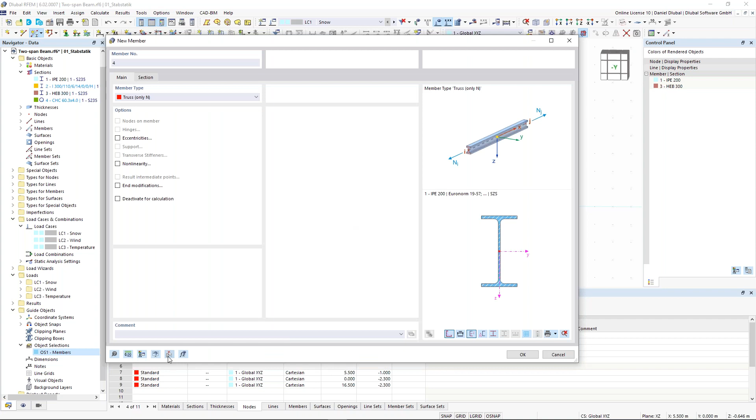I choose here the displacement vector at the Z, and this is 2.3 meters. I say okay. And now I will connect these two lines. So I take here this beam. In this case, the truss only N, and I refer to this cross section. So I choose here always this select object properties in graphic. I click on OK.

Now I draw it. So perfect. So I change here the display model, and now I see that these local node coordinates are incorrect. So I want to change them. I double click on one of these nodes, and I can change here the coordinates, and in this case I want to change them to -1.4, so it goes a little bit upwards. I say okay, and now the structure looks like that.

Okay, now I have to assign some nodal supports. I choose here these nodes, give them this fixed support, and the same here for this one. This will be a roller support in X direction. Okay, and now I create also a new member load. I go here, click on new member load, enter here a value of 15 kilonewton per meter, click on OK, and choose here this member.

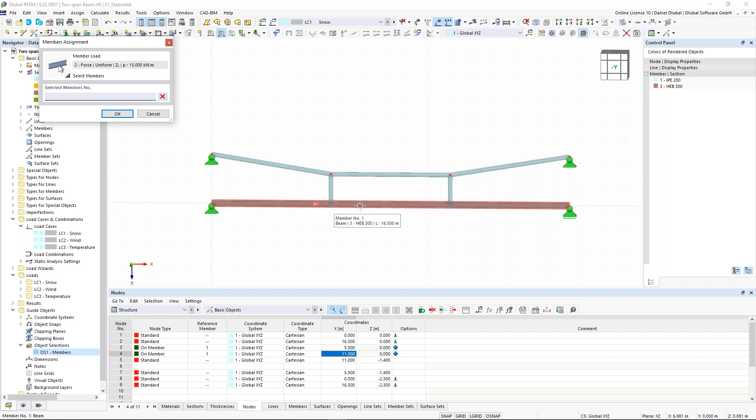The big advantage of this division with intermediate nodes is that I can assign this load and apply this load to one member. I don't have to click on these three members. This is one of the advantages when I divide the beam: I divide this beam with two internal nodes, but the beam will remain one beam. This is a big advantage in RFEM. Also the loads I can show a little bit smarter.

Yeah, now I calculate the result. Say yes. And now you see here the result. You see here the tension forces, because we have here activated the normal forces and also the bending moment. And this example is pretty nice because it shows the following thing.

When I take a closer look at the deformation, you see, due to the load applying on the beam, it deforms downwards. But we have here these tension members which carry the beam, and this is also the reason why these things get tension forces.

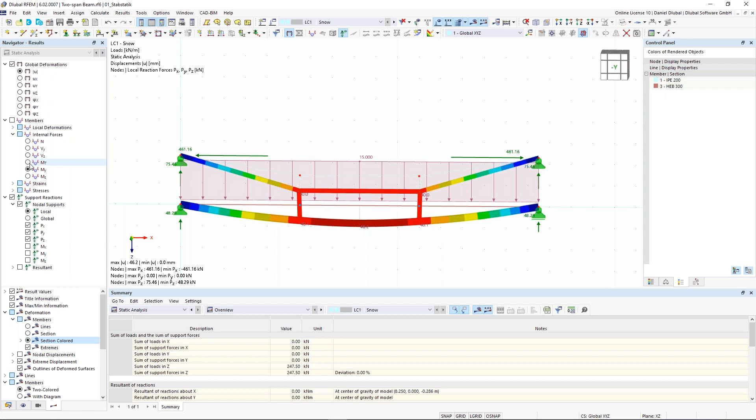And this explains also this interesting bending moment distribution, because here we get additional normal forces. You can see it as an additional support, and this is the reason why the bending moment looks here so nice. Also the normal forces. Okay.

So, we do have a last example. Question: yes, Daniel, real quick about this example. I got a pretty interesting question about how we would model a double beam if for some reason the bottom chord fails, and if it's already in place and an engineer for some reason decides to add another beam, how would you model that in RFEM? Like, would you add another beam over the old beam, or how would you try to model that in RFEM?

I'm not sure I understand the question, but if you do understand, maybe you could answer it. Like, if you already have an old beam as the bottom chord, and you want to add another one in real life, how would you model that in RFEM? From what I can answer, I think you can either edit the beam or edit the section, or if you want to add another beam, logically speaking, you would need different nodes, because you can't just pretend that two beams are connected to the same point. That's how I would answer it, but if you have a different answer, is it actually possible to add a so-called built-up after having the first beam already in place? Is that even possible?

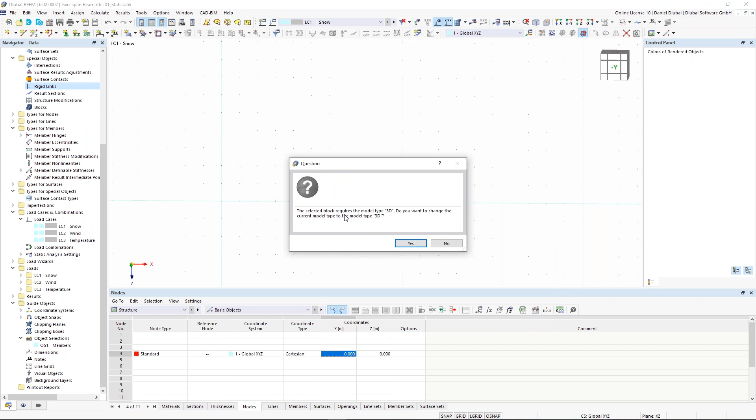So here in the toolbar center, we have blocks, and there I can create trusses, for example. I choose here this 2D truss, and I can generate this kind of truss very easily by just giving this block some parameters. I click on OK. I choose this one. I say yes, because now the block requires the model type 3D, and we will also use this model type 3D for our next examples. So next, we see here this truss, pretty nice.

For those who are familiar with programming languages and scripting, these kinds of blocks were created with the programming language JavaScript. So if you are familiar with JavaScript, you can also program your own blocks, and this is very powerful. And this is also one of my future theories regarding the whole civil and structural engineering field, that students should know how to program, because then they have a real advantage modeling, defining and designing their structures with different parameters. So I can only recommend learning JavaScript or any other programming language, even if you are a structural engineer.

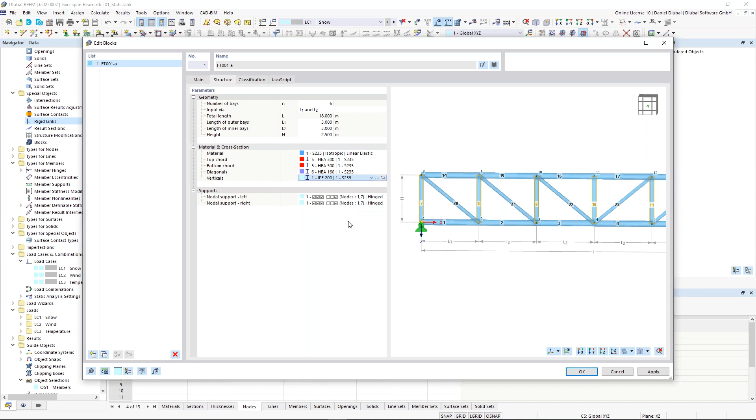And I see the structure here. Very nice, because I see all different cross-sections with a different color. This makes it easier to see suddenly the correct cross-section. Yeah, and you see, okay, the trusses are modeled as members with hinges. So what you can do is selecting all members, double click on that and give them here this truss behavior, and then you have the same effect. Okay, so much to that.

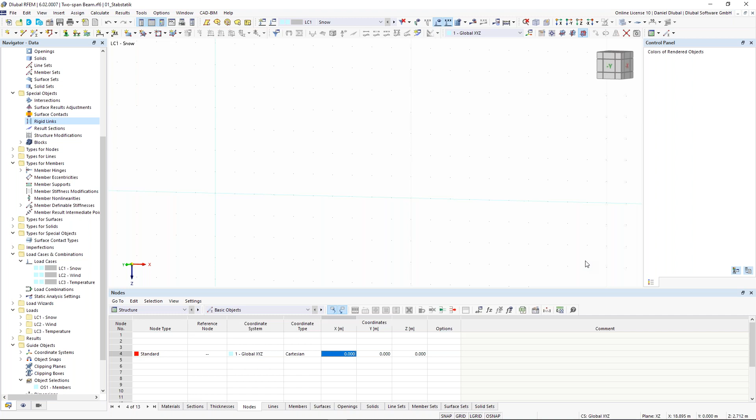Okay, last part of our online training is the calculation theory, second and first order analysis, and also then the stability design or stability analysis. So for that, I will model a very easy Euler case. So it's just a fixed cantilever column. So I create this one.

I click on beam, and now the section will be an HEB profile. I click on OK. 10 meters high, and now we need here a fixed support, and on the top we need here a single load. In this case, I give here 100 kilonewton as vertical load, and also a small horizontal load in order to see the effects of the analysis according to the second order. I click on OK.

Now it will be interesting. Oh, sorry, this is not correct. This one. I have to assign this one to the number 2. Now I go to the load cases, because in the load cases I can assign the static analysis. So first of all, I will change here these 2 load cases, and I say to that theory first order, and this one will be the second order.

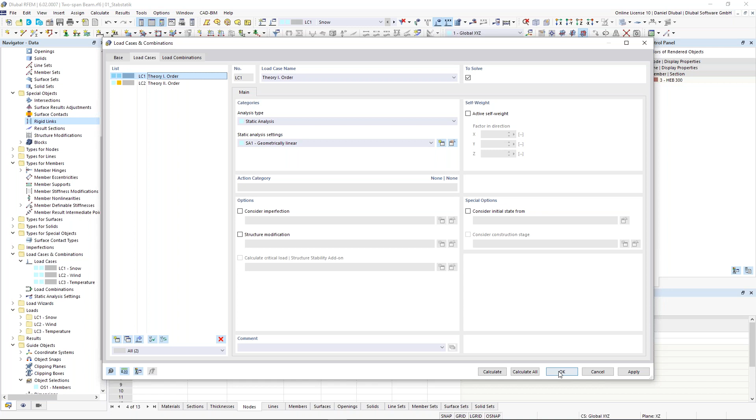Okay. You see here the load case 2 and load case 1. And now I want to calculate both load cases, and then I will show you the differences in the calculation. I say calculate all.

So, okay. Now I will create new windows. So I will create a new window here. And again, now I can show me several windows vertically. This one I don't need. So again, perfect. So this will take a little bit. Here the same.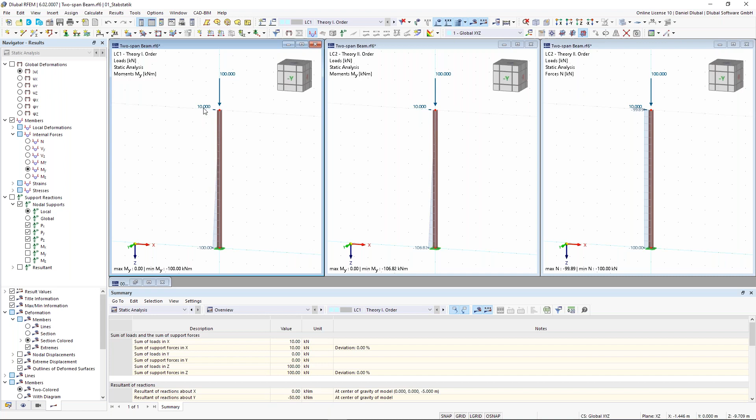Okay, good. Here we have the results of the first order, and here we show us the results of the second order. So first of all, the normal forces, but for this fixed cantilever column, the bending moment is more interesting for me. Okay, so let's take a brief look. I think calculating the bending moment of this cantilever column is no big problem, because 10 kilonewton times 10 meters, the height, this is my bending moment here at the support. This is according to the first order.

So when I calculate according to the first order analysis, then the program makes the equilibrium at the undeformed system. When I calculate according to the second order analysis, then the program makes the equilibrium at the deformed system. So you see here the differences. Here, first order, 100 kilonewton meter, and here, 106 kilonewton meter.

So we get more moments. And why? Yeah, because we have here also this vertical load, and this times the horizontal deformation on the top equals this bending moment at the bottom. So I can explain this here a little bit better.

So I will show me here the deformation in the horizontal direction, and then here the bending moment. Okay, so let's check it.

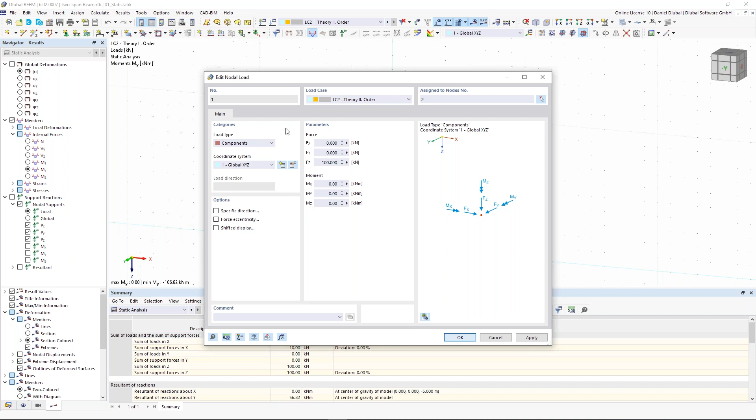I will leave here this example, but delete here the force in X direction. I say okay. And here the same. Okay. So what I do now is performing a stability analysis. And therefore I have to activate an additional add-on. I can go here to edit model base data, and I jump to the tab add-ons, and I activate here the structure stability.

So what does this add-on do? It performs according to the eigenvalue method buckling shapes or buckling forms, buckling lengths, and also critical load factors. So let's do this for this simple example, because everybody in your study has already calculated maybe a critical load for these Euler cases. Yeah, we can do this also in RFEM.

So let's go here to activate this load case, and the only thing you have to do, and this is almost nothing, just activate here the critical load with the structure stability add-on in the load case or also in the load combination. In this case, we make it easy. We will use the load case, and you can also edit it. So here, edit stability analysis settings.

We have here different stability analysis types, eigenvalue method, linear, non-linear. For our reasons, it's enough when we use this linear possibility. And here we can set up how many eigenvalues we want to have. For this simple Euler case, 4 are enough. Normally 2 should also be fine. I leave it as 4. And now let's calculate it. And now you will see, okay, we have the normal static analysis, this SA, and then the structure stability, ST.

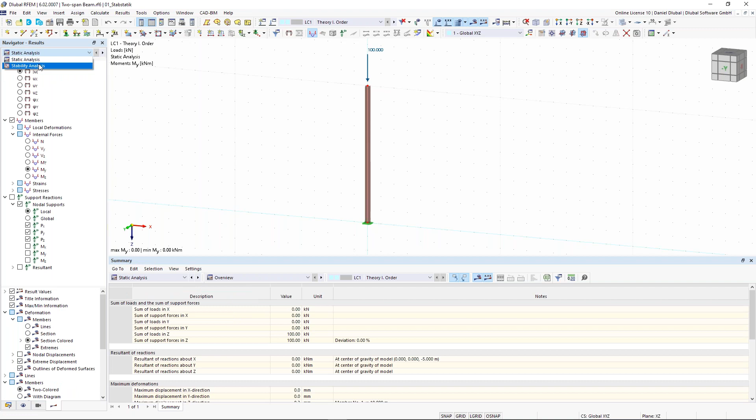Okay, and now let's take a close look at the results. We have here the summary, stability analysis, and then also here on the left, stability analysis, also here in this pull down menu. And this is pretty easy. So when you want to get the normal results like internal forces, deformation, you go to the static analysis. And when you do a stability analysis, just go here and see the results.

So what can I see here? First of all, I activate here the control panel again. I will show me here the mode shapes in order to make the display factor a little bit bigger. So this is important to know. The first eigenform or the buckling shape, it's this one. And why it's this one? Because the buckling shape tells me how the structure would fail when I would increase here this vertical load. And this would be the failure form.

And in this case, the profile would fail around its weak axis, because the flanges show to the X direction, and this is the stiffer direction. And so the first failure would be around its weak axis. And this would be the first eigenvalue, so the first eigenform. The second one would be around its strong axis. This is interesting, but this is clear. So when you would design this beam, then you would add here additional lateral supports, avoiding this failure around the weak axis.

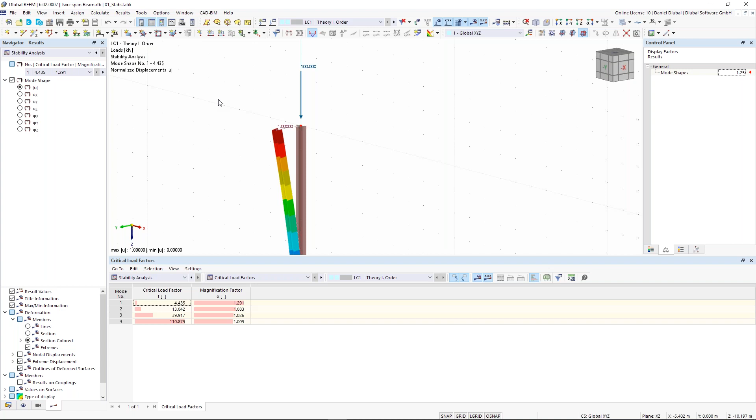When I multiply the 100 kilonewton by a critical load factor of 4.4, then I have 440 kilonewton. And when I would calculate the structure again according to the theory second order, the program would not calculate it because it says it is unstable. So if the critical load factor is smaller than 1 according to the theory first order, then the structure is unstable when I calculate it according to the theory second order.

So to put it in a nutshell, the critical load factor tells me how much I have to multiply the load by until the structure fails. This is the critical load factor.

The next thing, the magnification factor. This factor describes the relation between the moments according to the geometrically linear static, so theory first order, and the second order analysis. So when I have a result for the bending moment here at the bottom and multiply this result by this factor, I would get the bending moment according to the second order analysis, so the geometrically nonlinear analysis. Remember, second order analysis is a geometrically nonlinear calculation.

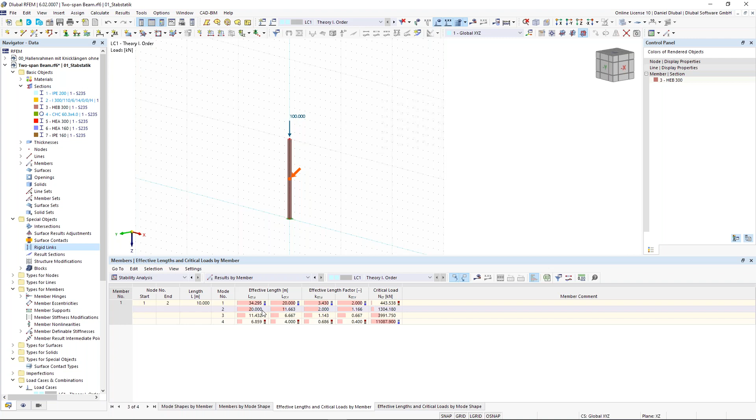And this is pretty interesting because the critical load is the 100 kilonewton, so the existing load on the structure, times the critical load factor. And 20 meters, this is also the case for Euler case 1. When I would have Euler case 2, then it would be 10 meters.

An important note is that I have deactivated the shear stiffness here in order to get the same results as in my hand calculation, but in reality you have a kind of shear activation of the profile. This is also the reason why it's activated in general.

Okay, so last example, I have a fixed frame where we also take a closer look at the different buckling modes, buckling shapes, because then I guess it will be more clear. So what I do is copy the whole thing here. And now again, my favorite function, drag and drop 10 meters along the x-axis. I put here an additional girder. It is a beam. The section is an IPE 300. I click on OK.

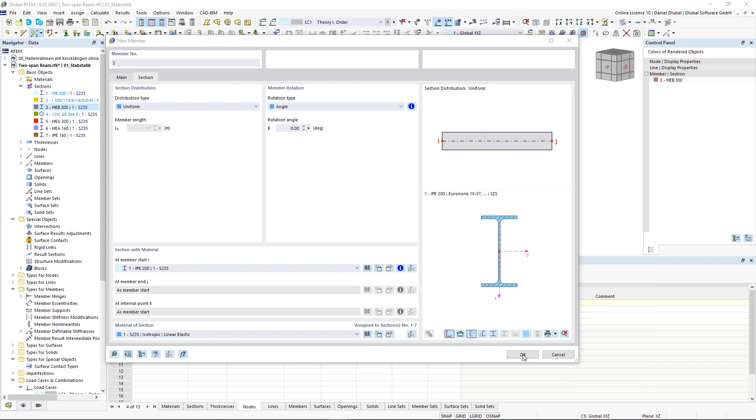And now I connect these two top nodes and change the height of the nodes to -6 meters in the Z direction. And now let's do the same as we had for Euler case 1. I go again to the theory first order, and now I activate 10 eigenvalues. And I say, okay, calculate it, please.

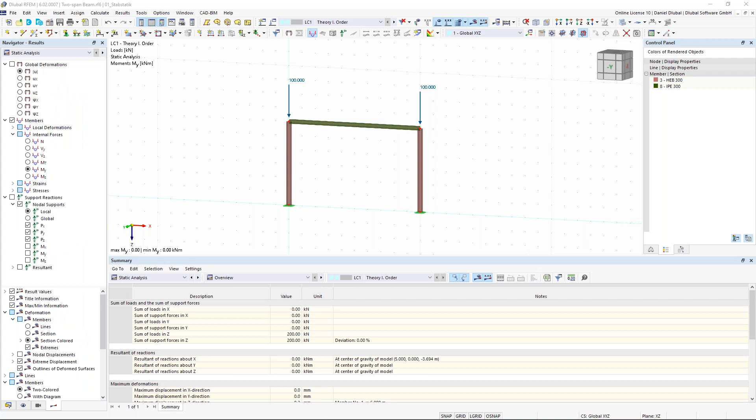So now let's take a closer look at the results of the stability analysis. What we see here is pretty interesting. Because we consider the 3D model type, we see that the first eigenvalue is a failure out of the plane. So I increase the display factor. Out of the plane, this is pretty interesting. Why out of the plane? Because we have a failure about the weak axis of our HEB profiles. The next eigenvalue is also out of the plane. Also interesting.

And the next one is in the plane. Okay, so when I would be a structural engineer, what I would do is avoid the bending, avoid the failure out of the plane by adding some lateral support.

Okay, so let's take a closer look to the effective lengths. So when I would perform a stability design of steel members, I would take here this effective length, and this is 2, because here we have our Euler case 1.

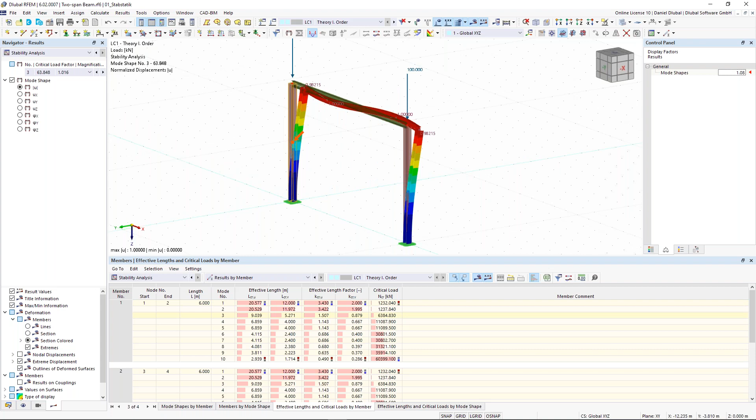So the next one, this one, for example, here we have buckling length mode 3 of 1.5 around the strong axis. So when I would do a stability analysis of this steel column, the equivalent length or effective length would be here 9 meters. So maybe you can also take another look to that one.

Here, this is number 4. I take also a look to that one, number 4. And here we see, okay, the effective length factor is again around the weak axis. In this case, 0.67. It's almost Euler case 3.

So now I'm the structural designer, and I want to avoid the structural failure out of the plane. So what I do, add some lateral supports. I will do this. I will add here these nodes on the top, assign here nodal supports, but only activate the U-Y direction, because this will be my lateral support. I click on OK.

I calculate the whole thing again. And one important thing is, don't mix the buckling shapes with the deformation shapes. Yeah, this is a huge difference. I'll show you why.

So this is the global deformation depending on these vertical loads. And the stability analysis, so the buckling shape, is another one. So don't mix it up. So now we have the first eigenmode in the plane. Yeah, and this is maybe something we know from the study. Yeah, it looks like that.

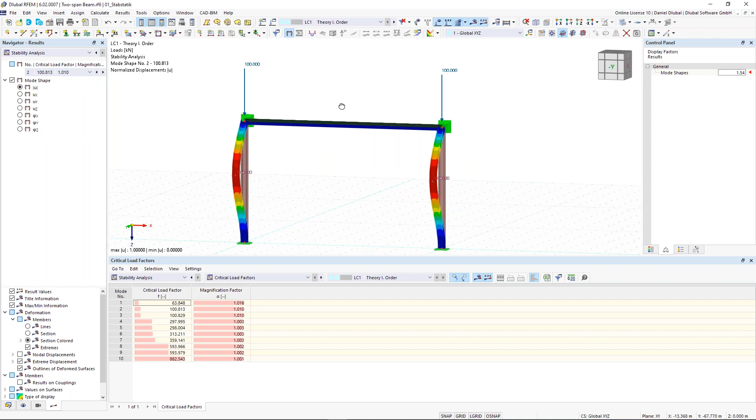And now the critical load factor out of the plane would be here, this one, the second one. And I had to multiply here this 100 kilonewton with 100 again in order to get a stability failure out of the plane. Yeah, but this is quite unrealistic. But now you have a kind of feeling how the structure fails when it gets too much compression forces.

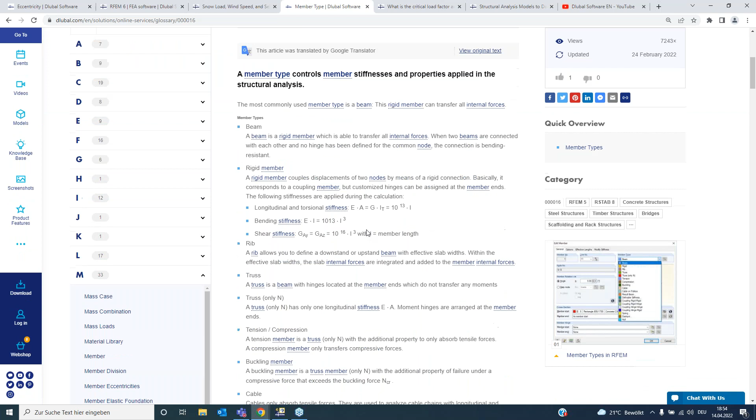You'll find the definition of it there. For another example, the member type - you'll find a more developed definition, since member type is quite a general term, and we are trying currently to make videos for every single term within the structural analysis wiki. One more thing: if you have any questions that we haven't answered during this training, you can look for answers on our website using our FAQs.

This is an example I opened today, about the critical load factor that you talked about, Daniel, and similar definitions and solutions can be found on our website if you just type the words you're looking for in our FAQs.

Another really useful feature on our website is that you can download ready-to-use structural analysis models. You can see there's a really wide range of different types of models from which you can download. And by the way, this is really new.

We started offering this about a month ago, I think, Daniel. We have opened the possibility for you guys to upload your own structural models. You can go to downloads and info and choose to submit your own structural analysis model. For example, if you feel creative right after this training and want to try RFEM and make your own model, maybe you can submit it afterwards to our website, and we can post it on our social media as well.